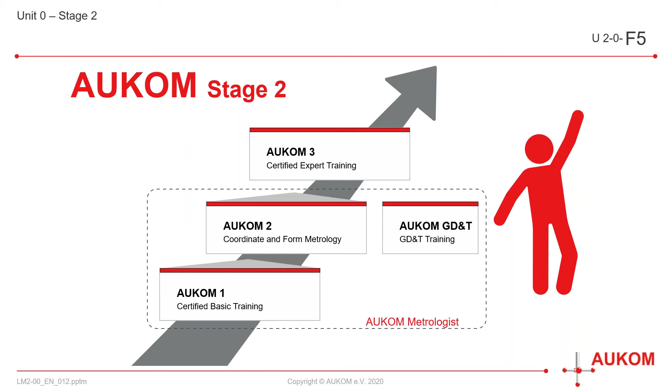So this is a slide that we show in every AUKOM because it's that important. This slide demonstrates exactly what I just mentioned, which is that the results we obtain from our inspection equipment must reflect what our part is actually like. Because if the part is okay and the measurement is okay, then everything is great, everything's all right with the world, we can move on. But if the part is not okay, and we say the measurement is okay, this can be dangerous.

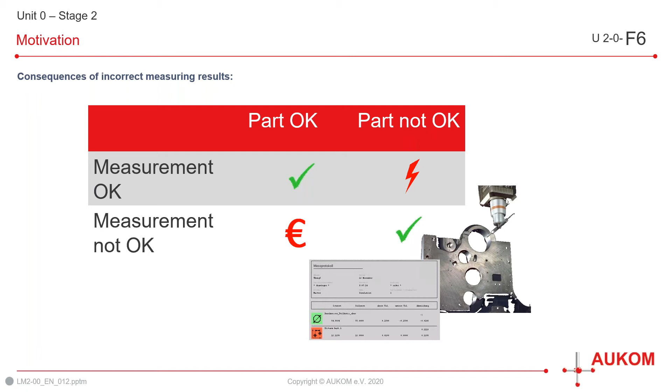We can see failures in the field. You see all the recalls you've seen in the news for different industries, and people can actually get hurt. Conversely, if you say the measurement is not okay, but the part is actually okay, this can be costly because then in your process, you're chasing your tail and wasting time, money, and energy. What we do want is, if the part is not okay, to also reflect that the measurement is not okay.

So here are the topics you'd find in the Level 2 course specifically. We're diving a little bit more into the different sensor types, they each get their own unit here. Even CT is now discussed in Level 2. So if you didn't get a chance to listen to Chrissy and my seminar about CT, come take our AUKOM Level 2 course. Freeform surfaces also need their own unit because they're unique in and of themselves.

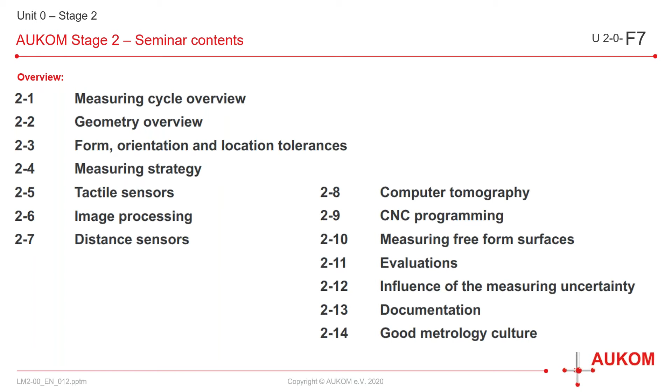And we throw some more math at you when talking about evaluations and measurement uncertainty. Don't worry though, nothing which you'd need a calculator for. But again, all of this is so that if you come across this, you know exactly what to do.

Mariano, you mentioned there's an exam at the end of the course. Do you do anything to help your students prepare for this exam? Yeah, totally, Jonah. So we have end of unit questions for all the units except the first and last ones, because they're shorter introductory and conclusion units. We also have a practice exam that I give to students the day before the test, a copy if they'd like to take it again and study overnight. And we review before the exam itself as well so that we can make you successful come test day.

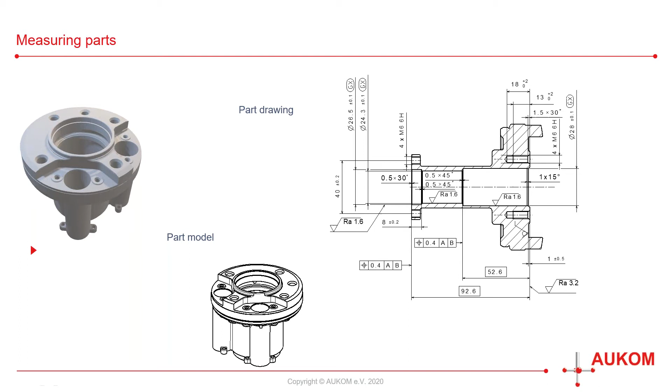All right, now we'll get into some awesome AUKOM. So the topics I'd like to train you on today is from a section of Unit 3, which has to do with form, orientation and location tolerances. But I'm just going to give you a snippet of the form tolerances, in particular straightness.

These are the controls that you'd want to use when the shape, if you would, of your part needs to be constrained. So the picture you see of this cylinder, which to the eye looks perfect, is really not so perfect in its shape when you look a little closer. Next to it is a graphic, which is exaggerated and is really what we want our metrology software to show us. The true form, which in this case is trilobish, if you would.

So this is very clear when we have enough data, which we touched on a little bit yesterday in our AUKOM level 1 presentation. Yeah, so Mariano, before we go any further, what could cause this type of distortion, what we see on the right-hand side of the screen here? I'm glad you asked, because this is also something we touch on in AUKOM. This particular deformation could have been from vibration during machining or over tightening of a 3-jaw chuck during production.

So it's easy to comprehend how these errors can come about, but it's also easy to overlook and also literally look over when it's not presented in such a way. You might have production personnel who don't want to look at this data because they're not sure what they're looking at. So what we're able to provide in the quality department with software like ours is a magnified color graphic, maybe, right, showing the deviations from the nominal element, for example.

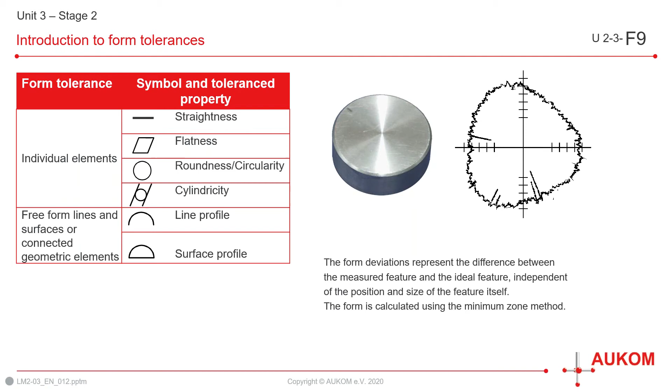As a last comment, you'll notice that the last sentence of the statement at the bottom right says that the form is calculated using the minimum zone method. Yeah, or the Chebyshev, which we discussed yesterday during the AUKOM level 1 training. Yeah, so it just goes to show you how all of this builds on itself.

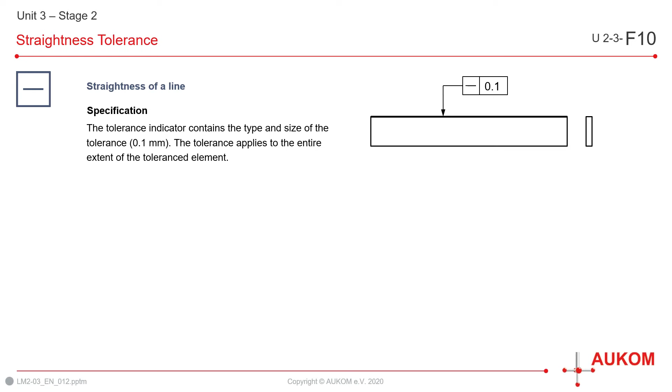So let's look at how straightness can be applied and how it works, which I really enjoy how it is presented, just like in the ASME Y14.5 standard, in the "this on the drawing means this in real life" style.

And I realized I just called a standard enjoyable, but someone's got to do it. I think I'll be the nerd. Although if I'm going to call myself a nerd, I might as well go the whole way and say that I have gotten certified to the 1994 ASME Y14.5 standards to the technologist level. So I'm going to defend my title.

But although the ASME standard is mainly what we use here in the US, there is also the ISO standard that is used internationally. So Aukom has made the effort to distinguish the differences, if there are any, throughout the course. And so here, to go into the straightness call out that we see on this simple part, kind of a thick ruler, we have the straightness call out pointing to a plane here. And so we want to figure out what it's trying to tell us.

So this call out, this feature control frame, has only one interpretation. Since it's ASME, that's what it is. It's just a drawing standard. And so we want to communicate exactly what it's telling us, which is mentioned in the middle here. The top call out can be thought about, as it says in the middle, the extracted line, which are the black dots, which is the data that was gathered from our inspection equipment. It says must not exceed at any point the tolerance zone.

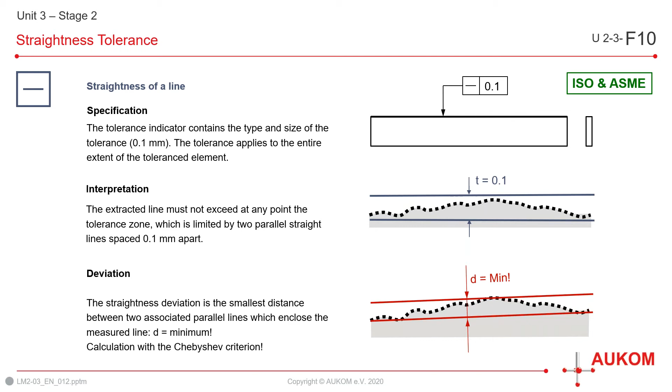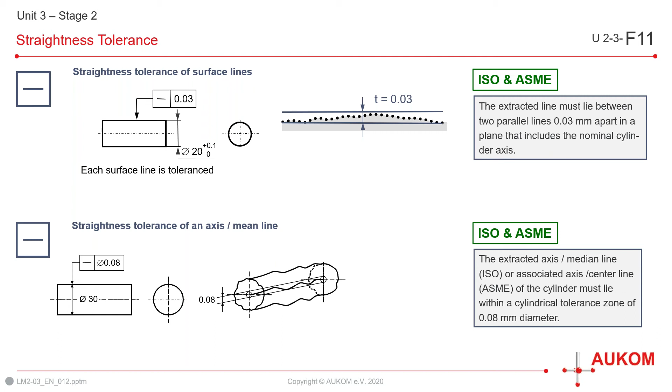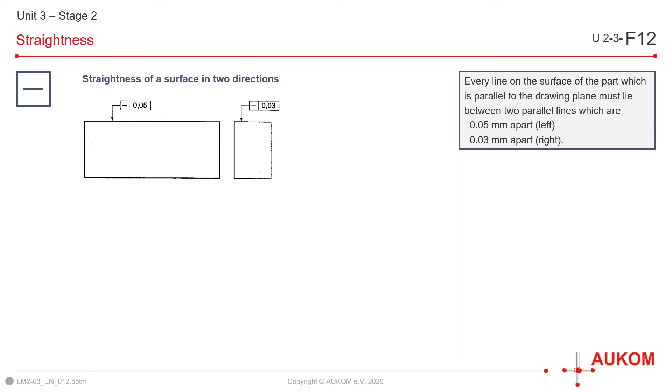So then we have a scenario where we're kind of going back to the first one, straightness on a plane, but it's showing in two different orientations. So we have one way, straightness of a plane, any cross section on the plane to 0.05, whatever units it is, and then 0.03 the other way.

So the other thing that you would notice about the AUKOM courses is that it's manufacturer neutral, is the term that I like to use. So much so that in level 1, we've taken out any branding from all pictures and made them look more generic with grayscale colors, because again, the focus is on the training material. We want to get that same foundational knowledge to everyone.

And furthermore, you'd be glad to know that students are getting the same exact content, not only anywhere you get trained in the world, but no matter who trains you, since that's what AUKOM seems to accomplish throughout the industry. So if you have the same part that's being measured in Madagascar and India, then you're going to get the same correct results at the end of your measurement reports.

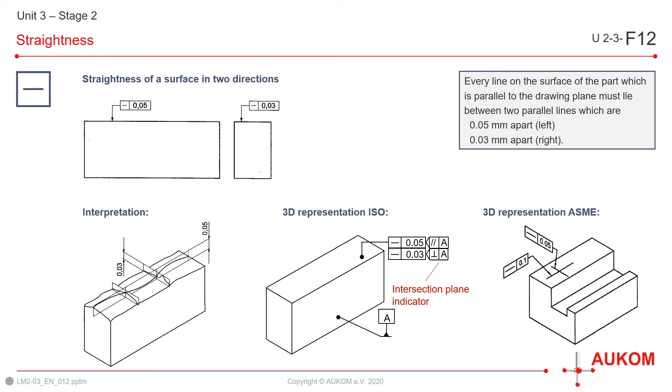But it's important to note that the straightness callout is only saying the shape of the pin shouldn't be a banana, or the bore. So essentially, how is the axis kind of shaping? Is it wiggly? Is it a banana? Doesn't say about the size, which kind of correlates with the form, right? But in essence, in metrology, we're controlling two different things. So maybe you can be shaped like a banana as long as the size is smaller.

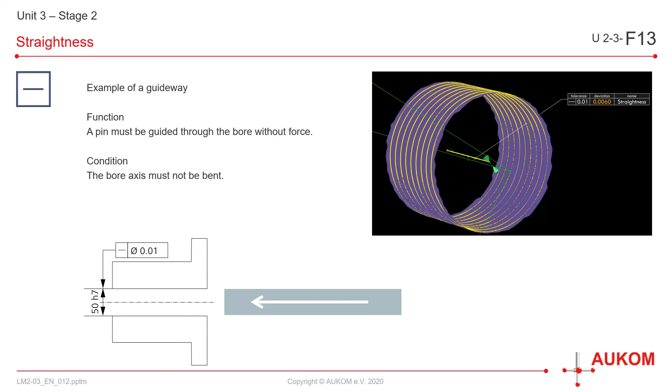So if it's a scanning sensor, they'll ask another student that has a scanning sensor how they go about their inspection, maybe the speed of their CMM, the type of stylus they use, how many points they're gathering, because they're all from different backgrounds. They have different machines, different sensors, and they measure different parts with different materials. So they end up learning from each other. And this is really the greatest thing about AUKOM, that we can come together to have the same understanding about our own process, which in the end makes all of us successful, I think.